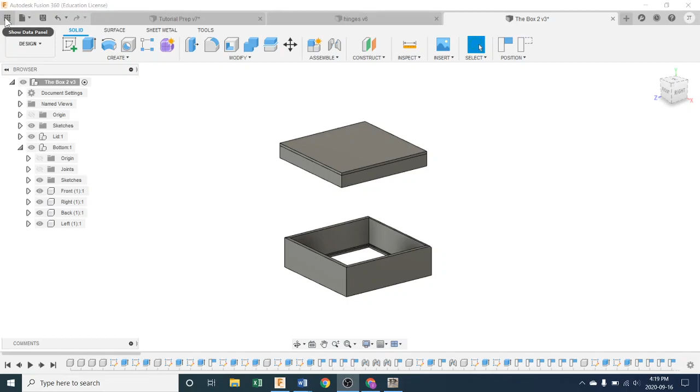Let me show you my data panel here. In my data panel, I have the tutorial prep file, which is this one I'm using to show you how this is all going to end up. I have box number 2, which is the one we're working on at the moment. And I also have the hinge file, which is this one. This is the file you're looking for, the hinge file that we're going to need to make the box work.

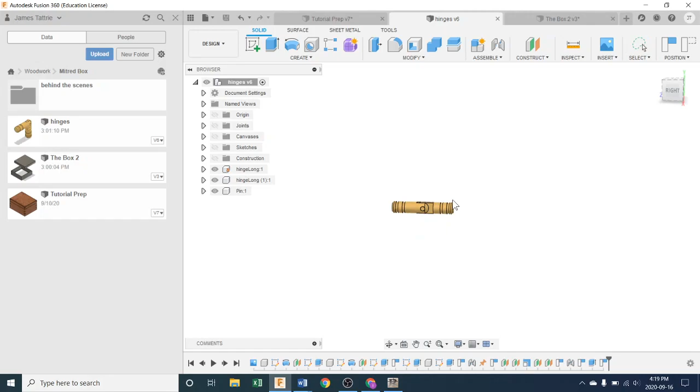So the way to do that is to head up to the top of your design window here to File and hit the little arrow beside it. In here, we are going to upload something, so we're going to click there, and then head to select a file.

The file you're going to find, and it's already found it for me, is under the H drive, School Share, and then under Maker Woodwork Students. Double click - inside there is Woodwork 10, and inside there are the Fusion design files that I've given you. Click, and there's only one at the moment, it's called Hinges. We click.

Now it's saying, hey, I found the file, where would you like to put it? Well, mine's going to go into my Mitred Box project. You can change the location by clicking there and putting it where you want. Hopefully you've got your project saved somewhere. Hit upload, and it gives a little status - and it's complete.

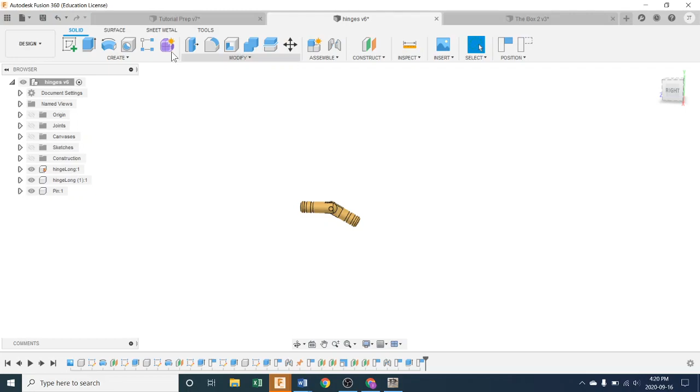We hit close. Now if I go back to my data panel, you'll see that a new hinge has been uploaded at this time. I'm not going to need that one because I already have it, so I'm now going to just delete it. And there we go - that's all you have to do to get the hinge.

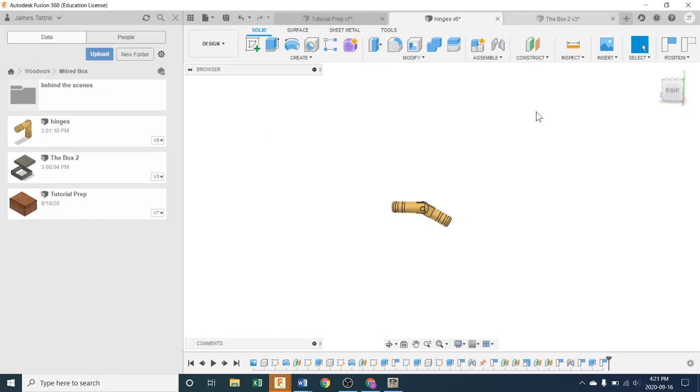And then what do you do once you have it? Well, you head back to your box. You pick bottom because that's where I wanted to associate the hinge - it doesn't matter too much, but that's what we're going to pick. We're going to make bottom active, and we're going to drag the hinge into the design space. And there's the hinge - there's our first one.

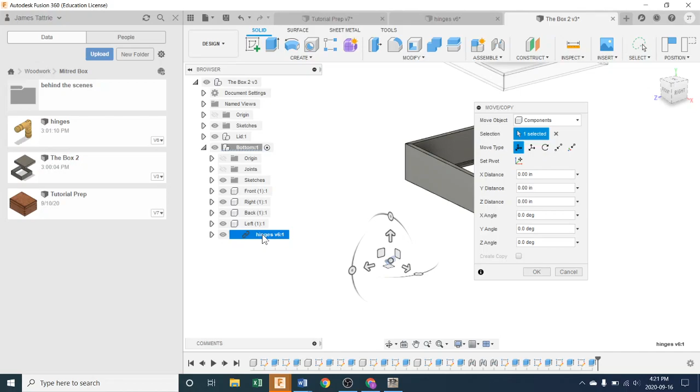Now notice that the hinge has a little link shown here. That means it's linked to the original drawing that I made. So if yours is linked, we're going to right click - oh, first of all, before we go any further, we're just going to push OK over here to bring in the hinge. And now we're going to break this link.

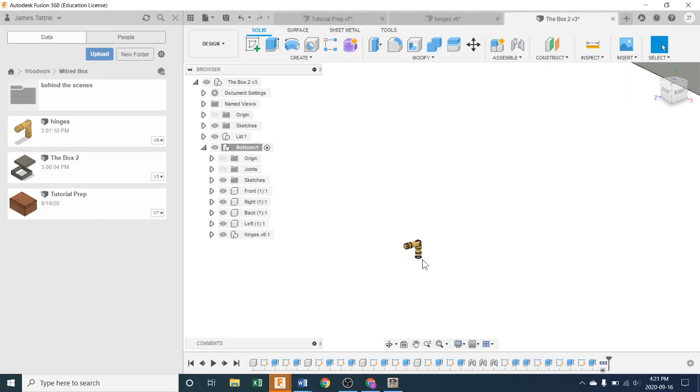That's it - that's bringing in the hinge. And the next one will have you actually insert the hinge into the box.